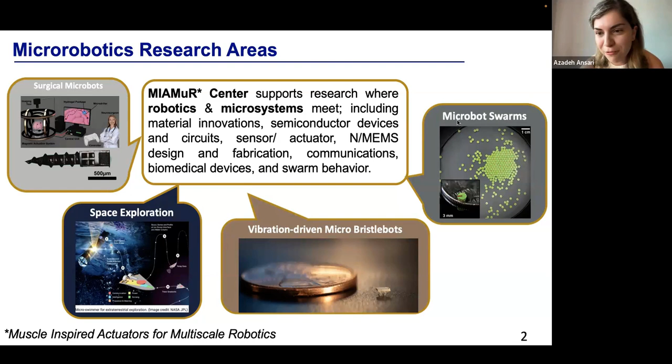So let me start by going back to Richard Feynman's classic talk. So Richard Feynman is an American theoretical physicist who got the Nobel Prize, and basically he coined the term nanotechnology. So he had a very famous talk, which was called "Plenty of Room at the Bottom" back in 1959, where he talks about scaling things down and actually coining the word nanotechnology.

And then 25 years after this famous talk at Caltech, he gives another talk called Tiny Machines. And at that point, electronic nanotechnology and MEMS sensors were not as mature as what they are right now, but he envisions that we can have microelectromechanical sensors and devices.

And finally, he asks the audience, can you think about writing the whole Encyclopedia Britannica on the head of a pin, right? So what does it take to write things down at such small scales, and can we store things at very, very small scales? And right now we know that we can do that. So we have surpassed what we thought we could do.

However, on the actuator side, or small scale robots, he talks about tiny machines and says, can we actually swallow a surgeon? And think about a little robot that can go inside your body, either for therapeutics or even diagnostics, and find out what's going wrong. Can I cut something and come back, take a biopsy, send something? So at that point he just envisions what happens if we can swallow a surgeon, right?

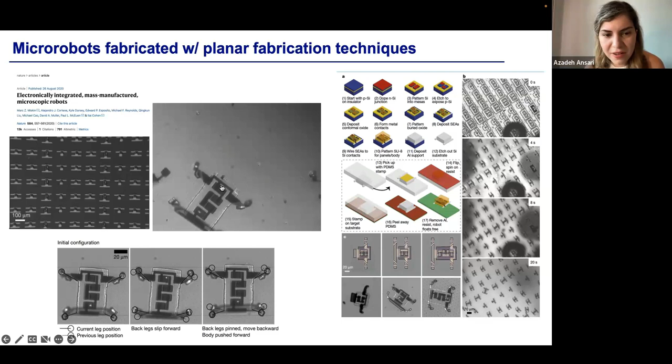However, applying a laser needs a line of sight and has its own disadvantages. Nevertheless, it's a pretty cool demonstration of what can be done using standard fabrication techniques.

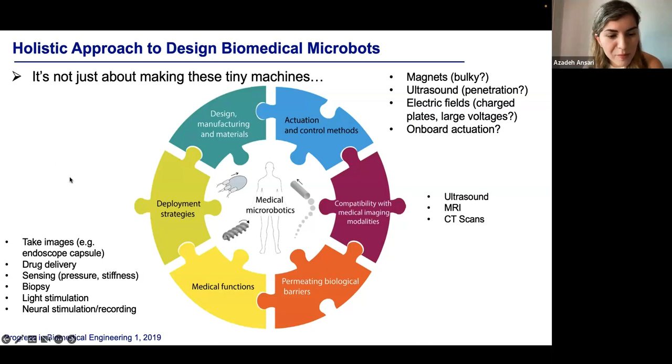Let me go over some examples of what is currently available, a little bit on the larger scale. One is this capsule endoscopy. You can take this capsule. It's a little big, and it's got a little camera inside it. This is commercially available. You can purchase these, especially if you don't want to go through endoscopy, which may be uncomfortable and inconvenient. These are right now about 2.5 centimeters in length, 1 inch.

Once you swallow it, you don't have control. You just rely on your digestive system to let it take images as it goes, and you can have a belt around your waist to collect these images. So this is a pretty compact system that has got the full sensing, communications and all of that.

Again, a little bit on the bigger size, 2 centimeters, still pretty big. And then there are these thermal microgrippers. So these guys basically do this when they get heated up. So you can use these pill cams, or basically capsules, and then load them with microgrippers. When the temperature goes up, these guys start getting actuated, and they can collect payloads and transport and deliver. So this is one extended application of these capsules that can hold these thermal microgrippers.

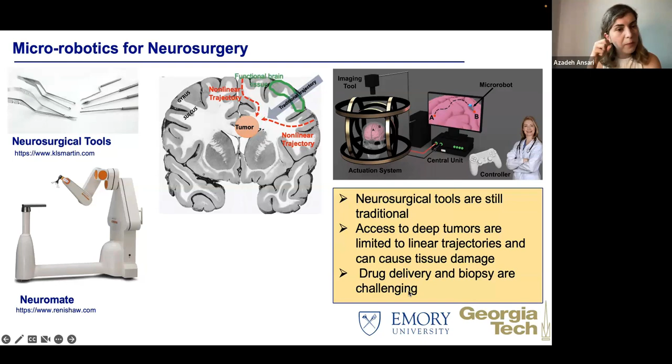So the idea here was, can the surgeon, like what Richard Feynman was saying, stay outside, hands off, and control this little robot and tell it to go from point A in the brain to point B in the brain? Now, the brain is a very complex structure. You have a fluid, CSF, you've got the tissue itself, and then there are these air gaps and holes, gyri, and all of these interesting, complex shapes. Can we come up with devices that can actually travel in any nonlinear trajectory and do something useful? For example, deliver a drug or take a little biopsy and bring it out. So this was how we started collaborating and thinking about this.

And then one of the works that we did was basically 3D printing this drill bit, which looks very much like an actual drill. But there's a tiny magnet attached to the back of this drill. So when you have magnetic fields, this guy can rotate, right? As it rotates, it basically shears through the tissue and penetrates inside the tissue.

So this is how we fabricate it. We put the magnet first, and then we do that nanoscale 3D printing or the 2-photon lithography on top of this magnet, as you can see. And in this particular example, we have a little backpack basically for this robot that has a hydrogel, and I'll talk a little bit more about what is interesting about this hydrogel. But basically, you can load it with drugs, and when the pH of the environment changes, the hydrogel will release the drug, right? So I'll talk about what that means.

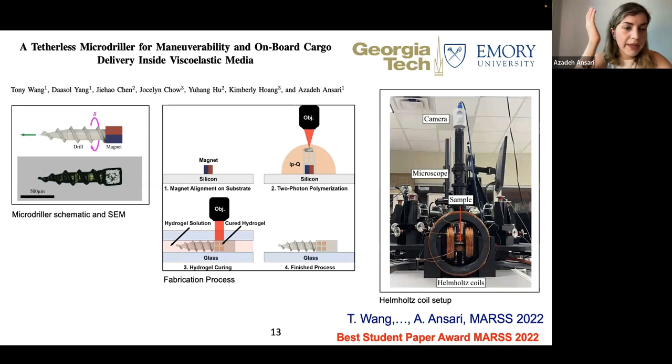And then we control everything with external magnets. So the idea is that there will be, you know, you can think of a helmet, right? Some magnets maybe around the head of the patient to control this little drill bit. So here we are showing basically how this little robot looks. So this is a video. My student is controlling this with a joystick, and he's trying to write Georgia Tech. Now, it's a little rough at some edges, but the robot can actually turn and move around.

And this is inside a hydrogel that resembles the brain in terms of its stiffness and mechanical properties. So people use agar gel as a phantom instead of using brain. It's transparent, so you can see what goes through, but mechanically it's very similar to the brain. And the magnetic fields that we use are pretty small. So this is 10 milliteslas. For reference, MRI uses a couple teslas. So this is not a very large magnetic field that is used to move this.

And then we tried this in different agar gel concentrations, characterized the speed versus the frequency, the angle of rotation, and basically the controls aspects of these robots. And my graduate student actually won a best paper award in a microrobotics conference for this work.

And then a little bit more about the hydrogel part. So apparently tumors are a little more acidic than healthy cells. So their pH is different. So the idea here is that when a driller goes into an environment, if it's more acidic, it releases the drug much faster than in a less acidic environment. And this difference is very small, pH 6.2 versus 7.8, and you can see a pretty drastic change in the release of the drug or in its diffusion versus different pH values.

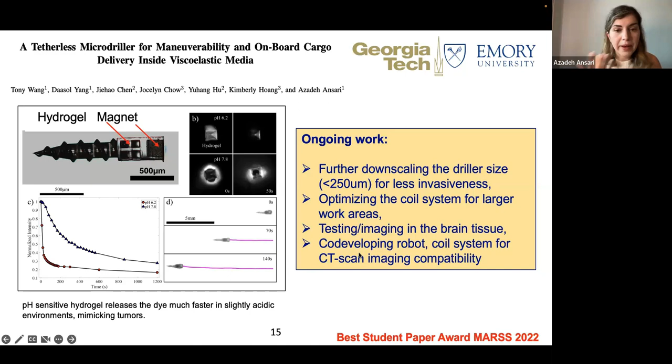So ongoing work is further miniaturizing these because we want to minimize tissue damage as much as possible, right? So the smaller, the better, obviously. So we're looking to make these a little less invasive, optimizing our coil system for larger areas, right? Starting maybe with a pig head or a mouse head, that's even smaller, and then moving on to an actual human size head. And then testing and imaging in actual brain tissue. So right now we're testing these in phantoms or gels that resemble the brain but are not actual tissues, and co-developing a coil system that is compatible with an imaging modality such as a CT scan.

And this is also some work that we are collaborating on with another professor at Emory, Dr. Pourmorteza, who works on CT scans. So in this work we are using different metals on this little robot, and they have a specific type of CT scan, a higher resolution photon counting CT scan. And when we use two different types of metal, they're able to distinguish between the two. So you can basically know the direction of your robot.

Let's say you have tungsten on the top and neodymium on the back of your robot, right? So you want to know basically where your robot is pointing. And the system has a good resolution and lets you know what the direction of this robot is. So this is ongoing work, obviously.

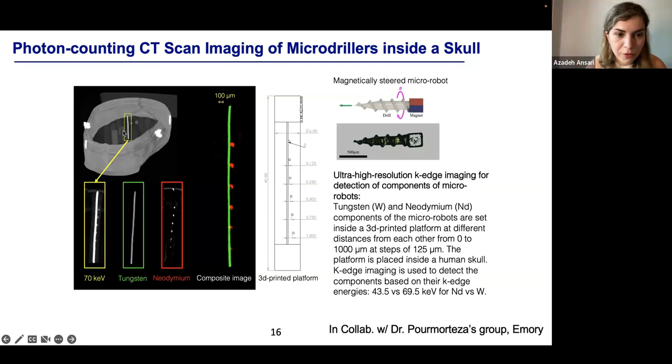This is basically an actual CT scan image inside a skull. But we're looking to further miniaturize these devices and still be able to resolve them with imaging modalities.

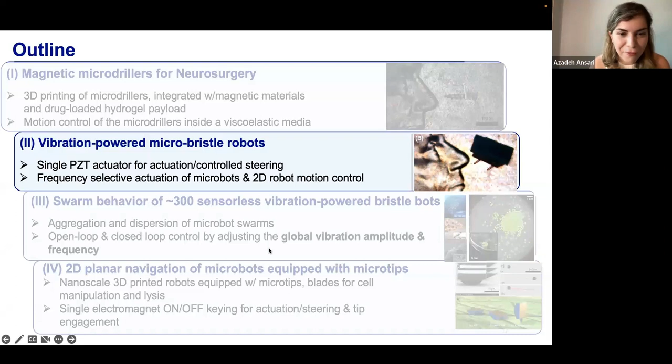All right, so I'm going to switch gears a little bit and talk about vibration-powered micro-bristle robots. So this is the work that I first started when I joined Georgia Tech. So here we have a little vibrating robot, and how it works is that we have a piezoelectric actuator. Again, this is the same thing that you use in a buzzer or even the lighters when you press and you can generate electricity. It's a conventional way to convert electrical energy to mechanical energy and vice versa.

So how these work is that generally, if you apply an electric signal to them, you can get some motion out. And you can use that motion to move a robot, right? And these are basically 3D printed legs, so little bristles, little legs, nanoscale 3D printed. And when you turn on an external vibratory signal, you can basically move them around.

And what we did is that we started designing different types of legs, playing with the angles of the legs. And again, these are 3 of the robots on a US penny, just for the reference of the sizes. Let me show this, and then I'll show a YouTube video. So we play with the leg designs and try to see if that affects the motion of these robots. And here you can see that some of these angles work better than the others and have faster speeds and better directionality. So we looked into this to see what is really going on.

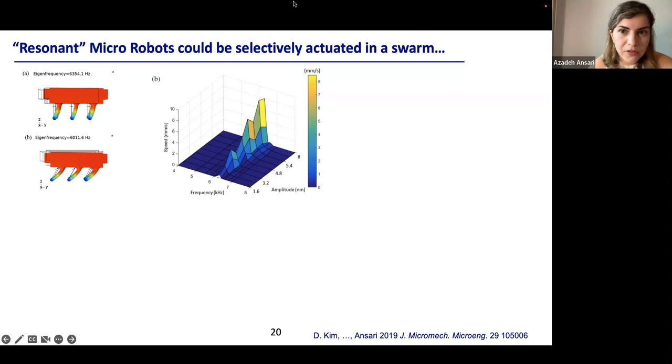And it turns out that there is this resonance behavior, again, very similar to the tone that a guitar string can make, right? So at a very specific frequency, the legs of these robots respond to that frequency, and they don't respond to any other frequencies. So what we do is that we design different robots that have different resonant frequencies. So when we apply that particular tone, they get actuated. So that was kind of the beauty of this work, that you can selectively actuate different robots by tuning to the correct frequency.

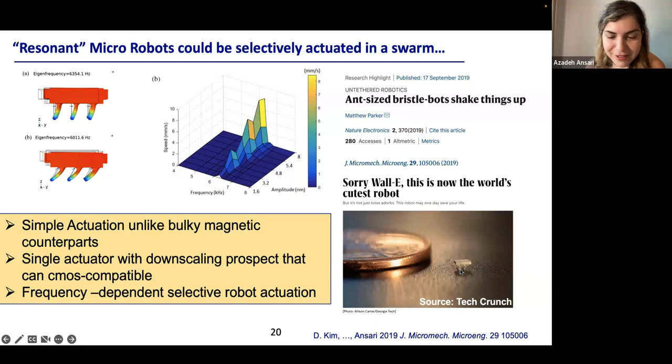And this work basically got a lot of attention. It was covered in Nature Electronics, and then some of these pop media, scientific papers. So this one is saying, sorry, Wall-E, this is now the world's cutest robot. And this was, again, our little tiny robot compared to the US penny. And let me show this YouTube video from Georgia Tech. Let me make sure. Oh, okay, here. I hope you can all see.

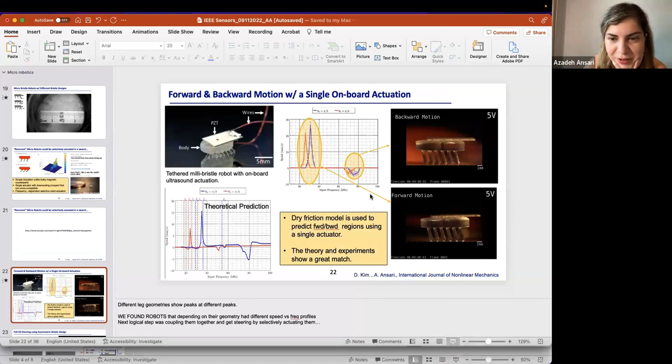So let me go back to the slides. So once we had one little robot that could basically move at a certain frequency, we thought, how can we control it? Can I make it move right, left, forward, backward? How can I make that possible by just changing the frequency of the actuator? So we had this little PZT this time on top of the robot, and we started changing the frequency, and we were able to see that at a very specific frequency, the robot moves forward, and at another very distinct frequency, the robot moves backward.

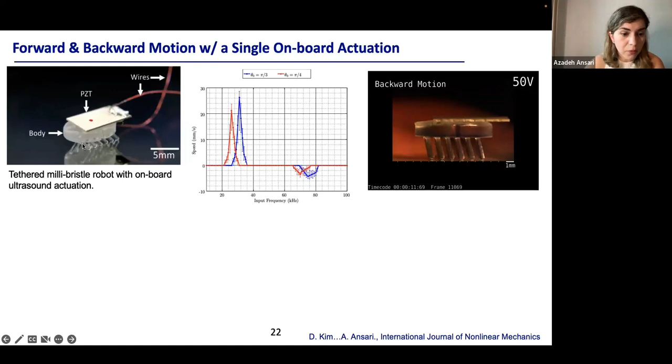And these frequencies would differ if the angle of those little legs would change. And theoretically, we were able to basically prove that with dry friction models, that you can predict this forward and backward region when you change the frequency. And the motion is basically called stick and slip, which I'm not going to go into much detail.

And then the next idea was, can I have asymmetric legs such that at one frequency, only one set of the legs move? Because we're hitting the resonance frequency of one set of the legs so that you can turn effectively in one direction. And at the other frequencies, the right side of the robot moves while the left side is anchored so that you can move to the left. So theoretically, if you can selectively actuate the left side and the right side of this tiny robot, you can make it move in different directions.

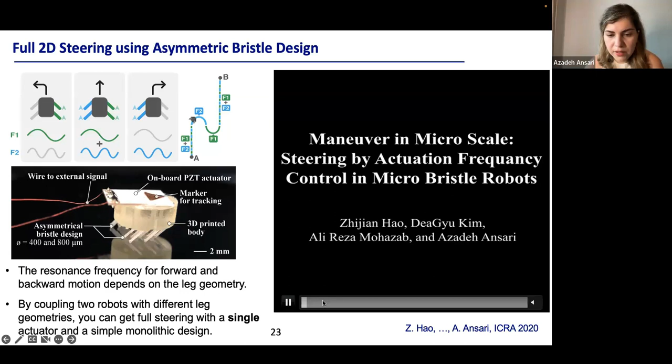So we worked on this concept, and we were able to show steering of this robot when we were changing the frequency. For example, at 49 kilohertz, so this video is muted, otherwise you would have heard this. It's not a very pleasant sound, but it was moving forward. You change the frequency a little bit, then it starts moving backward. And further, we could make them turn or move left and right by another set of frequencies. And if you mix these frequencies, you can basically cover this whole 360-degree 2D plane. And these are all open loop.

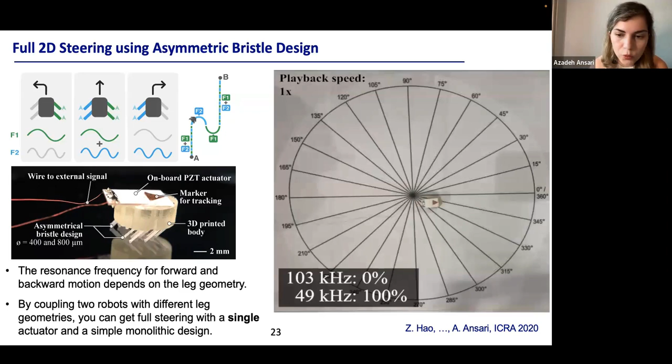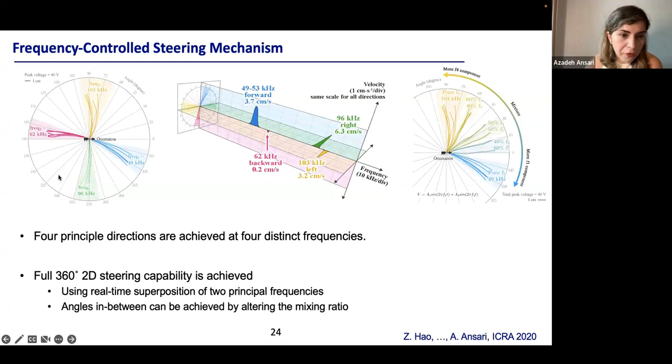So basically, if you use closed loop controls, obviously you can have very precise X, Y, Z, or, this is 2D, X, Y control over the location of the robot. So this is just some characterization showing, at each frequency, where the robot moves and how we can cover this full 360-degree 2D plane.

Now, once we looked at these individual robots, we wanted to put them together and see what we can do. And remember, these robots do not have any sensors on them and they do not communicate with each other. So they're basically like particles bumping into each other. And we wanted to see, can we use the collision of the robots to control them to aggregate and disperse, right? By just changing the frequency and the amplitude of the external vibration.

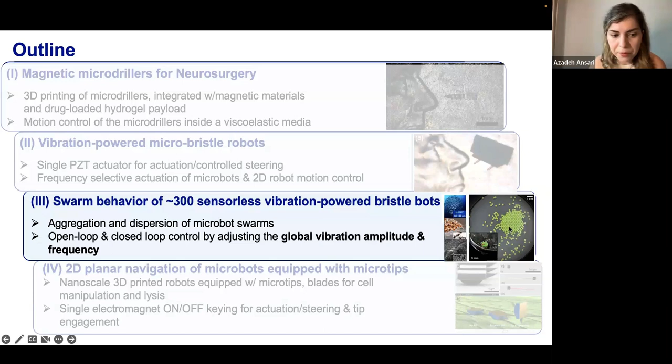So here we partnered up with a few of our roboticist colleagues at Georgia Tech, who were responsible for the modeling and the algorithm part of this, and we were making these robots for them. So here we put 300 robots with little legs, and we put them all on a table that just shakes up and down.

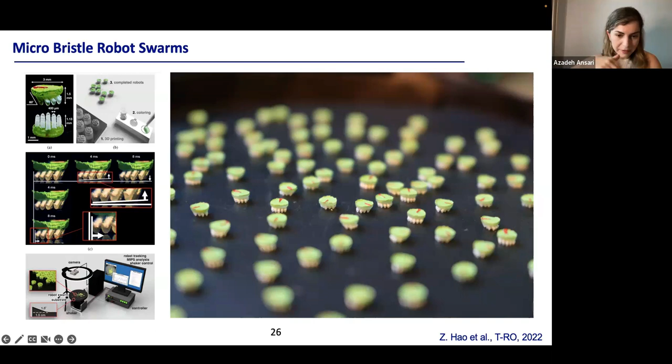And I think this video, let's see if it plays or not. Let me just go to the Google Chrome link, because this always has issues. Oops. 1 second. I think it's here. Yeah. Okay, let's take a look at this one here.

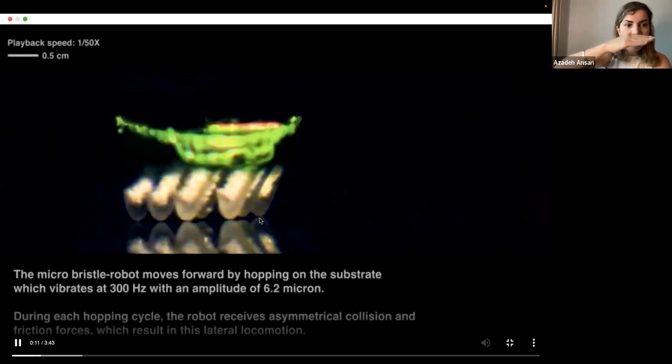So this is an actual image of these robots. This is how one of them is moving. Again, this is not the nanoscale 3D printer, so you can see that the features aren't very fine, but it was fast and cheap. That's why we went with a little bit rougher edges. So we characterize the motion of each robot first. Now let me go a little faster here.

And then we change the vibration conditions, right? We're changing the amplitude and the frequency. And again, this is a measurement result. So we can see that there are some areas where the robots aggregate and have higher density, and some areas they have lower density. And we wanted to see how the mobility characteristics of the robots change based on their density.

So we have these conditions that you can see. For example, some of them will have stable clusters of robots, and some of them will never form a cluster. And again, same robot, same ground. It's just different vibration conditions being applied to them. So we looked at these different conditions, and we were able to control the clustering behavior of these robots by changing these external vibration parameters.

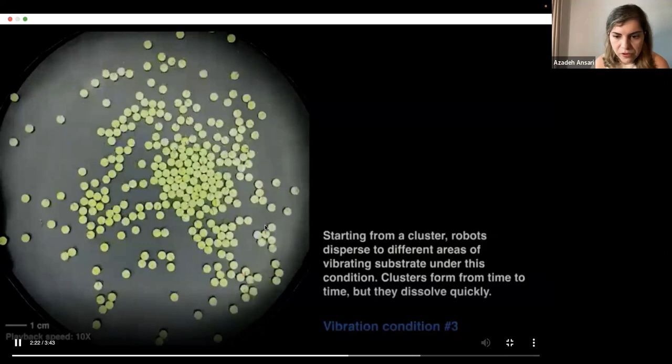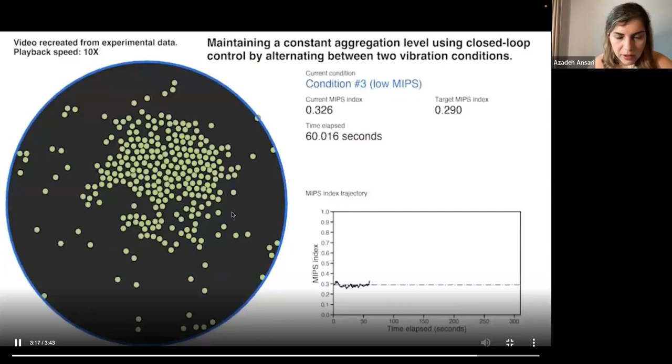So, it gets dispersed in condition number 3. And then you can change the vibration condition and get them to cluster, like in vibration condition number 1. And these are stable clusters. And let me spare you the rest; these are details on how you can control these robot swarms.

All right, so now let me move a little to the applications of these 2D robots when they are scaled down. So one vision that we had was, if we have a cell, a bacteria or a cell, can we use these little robots to puncture them, or to lyse them? So here is an image, not using a robot, but using mechanical lysis of a bacteria. And you can see that the internal fluid is just getting out.

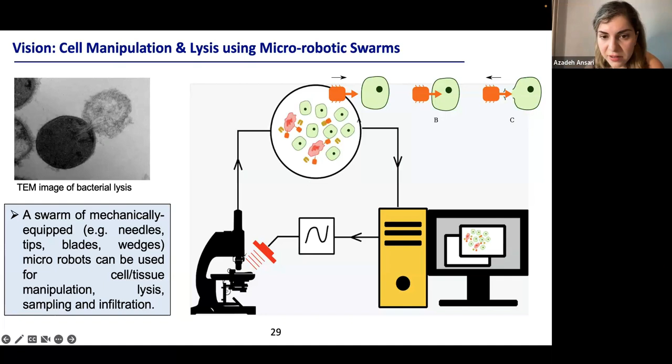And our idea was, if we have a sample under a microscope, can my little robots find out which cell is good and which one is not by some sort of biomarker or sensing that they do, and then be able to lyse them or manipulate the cells, let's say.

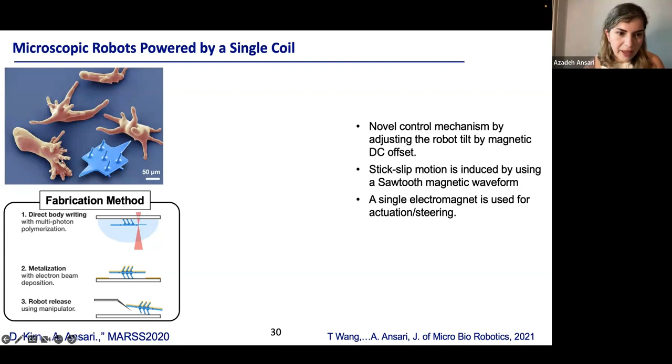So we built these robots, and here we're showing how the size scale compares to some of these unicellular organisms like amoebas, for example. So you can see that the scale actually matches these amoebas, and we have these little tips that can be very sharp, and they can penetrate into cells.

So again, we're using magnetic fields this time, but it's not a coil around it. It's just a little compact electromagnet underneath our stage. And this robot, again, is moving. This one doesn't have any tip or blade. It's just moving forward under a simple magnetic field turning on and off.

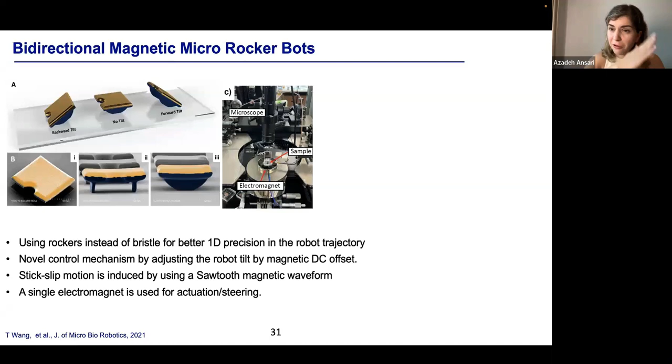So pretty simple mechanism, unlike the brain one, which was more complicated. So we came up with different ideas. So these ones are kind of rocking, like a rocking chair, as you can see here, and moving backward and forward by turning the magnetic field on and off using different types of waveforms, right? For example, you can have a slow ramp and a steep decay, and you can tilt the robot to the front or to the back and therefore control the motion.

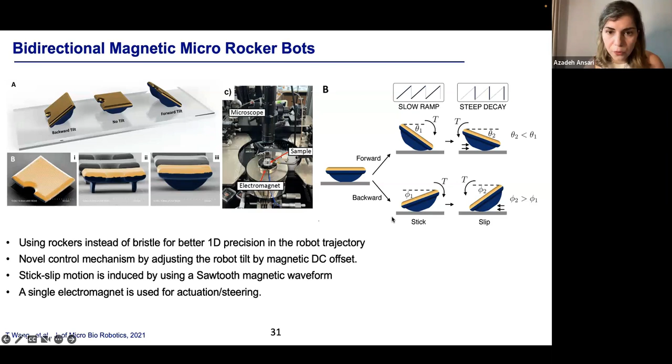So let me show a few videos here of these. We call them micro rocker bots. So here, basically, we're applying a sawtooth waveform to the little magnet underneath this stage and turning it on and off. And the guy is basically moving forward. We change the magnetic field conditions, without moving anything, and basically the robot moves backward.

So this robot is 100 microns. So this is exactly the diameter of your hair, basically. So pretty small, again, truly microscopic. And then let me move this one. So here it's just showing that you can have two robots that move in opposite directions, just depending on how they are biased in terms of their tilt.